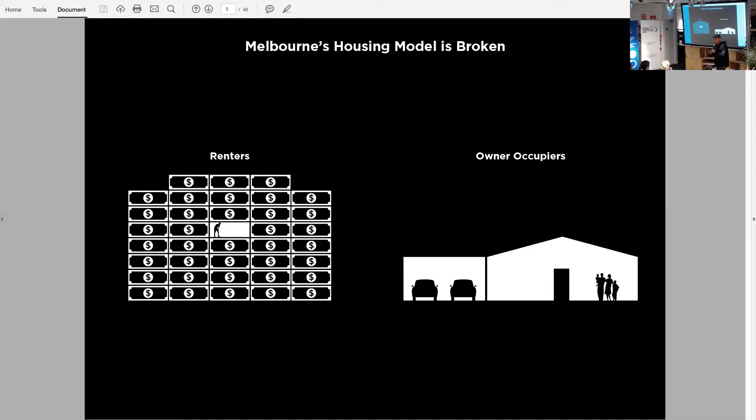If you live here, the way you enter these houses is through the garage. So you drive to the city, and if it's busy it takes an hour and 15 minutes. Then your partner needs a car as well to get to the city, taking them an hour and 15 minutes, working in a different part of the city. You both come home, drive into the driveway, into the garage, the roller door comes down behind you, and you walk into the dining room.

You can watch TV. If you need a loaf of bread or some milk, you get back into your car, the roller door comes up, and you drive 3 kilometres to the nearest supermarket, where you get your stuff and come back and drive into your roller door again.

The great thing about living there is that there are these big houses on these quite small blocks with quite dark roofs, very close to each other, but you never have to talk to your neighbour. There's an incredible sense of social isolation and high degrees of anxiety in these types of settlements. And in the city, if you live in an apartment building with 400 apartments, you get out of the lift lobby with 8 lifts, and there's 32 doors off that lift lobby. You don't talk to anyone because you're probably never going to see them again. There's this sense of anonymity there, so you stand quietly in the lift and don't bother engaging with someone. Again, this incredible sense of modern isolation, despite the incredible proximity in which people are living.

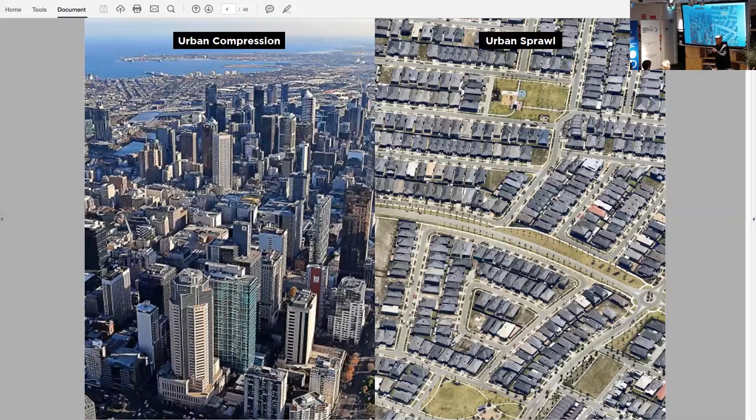In both of these instances, we've seen incredible failure of our social city planning. This is housing of spreadsheet, housing of economics, and not a housing of anthropology or of how we want to live together as people.

The City of Melbourne under Rob Adams looked at how do we actually house people in a meaningful way. If we have to house 3 million more Melburnians in the next 35 years, how are we going to do that? They looked at successful examples which existed pre 80-story towers and pre urban sprawl.

So they looked at Rome, Barcelona, Paris, Amsterdam, even New York. I've seen some incredible images of New York pre-motor car, where the streets were totally occupied by playing children and street vendors, and the streets were a place for people, not a place for cars.

And they historically looked at Melbourne. The way Melbourne used to work was a set of villages around train stations or particular tram stops or a market, so there was a reason for each of these places to be. People would work and live in those same villages. They would live upstairs, work downstairs, their kids would go to the local school. There was a strong sense of community there.

What they found through that study was that of the 3 million people coming to Melbourne over the next 35 years, Rob Adams' team at the city design team at the City of Melbourne worked out that they could house 2 million people, so 2/3 of that population growth, on high streets - Nicholson Street, Lygon Street, Sydney Road - on train lines, tram lines, where people could be serviced by their local community, rather than building at the city's edges, where historically we used to grow our food.

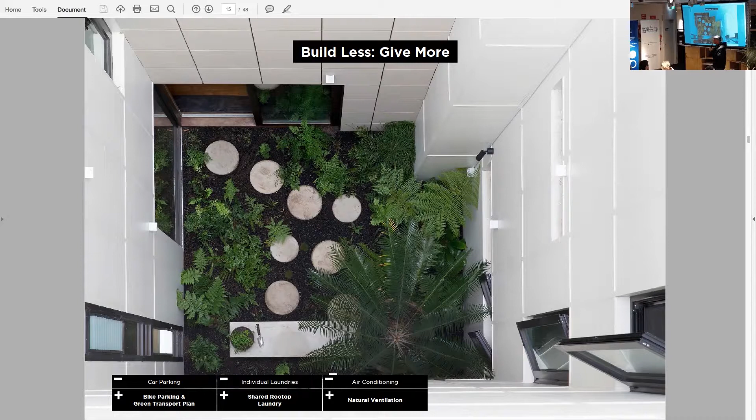Fundamentally, if we were designing in Germany, a 19 to 27 degree comfort range is fine. But in Australia, we're meant to design between a 19 and 23 degree comfort range, so apparently we're not as strong as our German counterparts. Well, historically we used to be, because my grandmother never had any air conditioning and she could deal with it. But anyway, we took all the air conditioning out, and by doing that we kept the cost of the apartments down by about another $4,000 each. So constantly reducing the price of housing.

And also reducing the cost of operation. Tam and I actually live in this apartment in the Commons, and our bill is generally around $42.

When we're away, our usage is 1.2 kilowatts a day based on our fridge use only, because we've got a kill switch by our door, like a hotel, which turns off everything except the fridge. So we know how much our fridge uses.

Interesting, while I'm on the fridges - the Commons is located right next to Anstey Station, right next to the Upfield bike path, right next to the 503 bus, and about 150 metres from the 19 tram. It's about 120 metres from the Brunswick market, which is like the cheapest fruit and veg in Brunswick, and right near the Royal Nut Company, and obviously close to A1 Bakery and a whole bunch of great stuff in Sydney Road.

We designed really, really small fridge cavities. There's only 13 models of fridge that fit in here, and we did that intentionally. The idea was to stop people wanting to drive to the supermarket.

So we surveyed people when they first moved into the Commons. About 55% of people had cars, and of those, everyone with a car drove to the supermarket once a week to do a big shop. At the end of the first year, people realized it was pointless going to do a big shop because it didn't fit in your small fridge. So people started to shop more locally and started to walk.

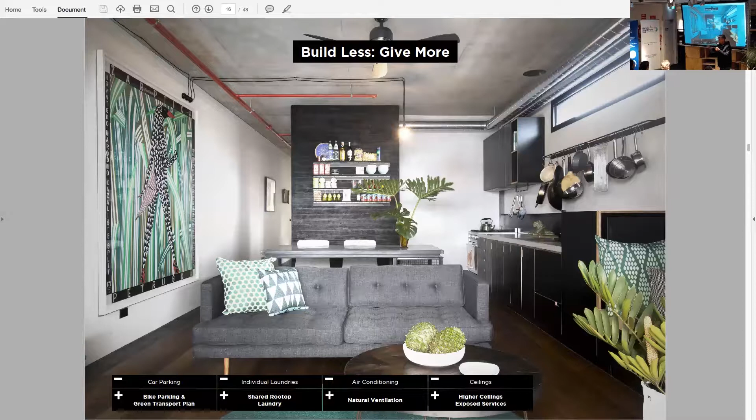There's no tiles in the bathroom, it's just fibre cement sheet with zero VOC water-based epoxy painted on it. There's no chrome on the tapware or door hardware - it's taken off the production line before it gets wrapped and shipped to the chrome platers, chrome plated, rewrapped, sent back to the tapware company, and then sent out to you. It's kind of we take all those things out, so there's no chrome in the building anywhere.

Instead there's lots of raw brass. The door furniture on all of the joinery is not handles, but holes. I don't know if it seems simple, but you make a reduction rather than addition - less material rather than more material. The project architect, Bonnie Herring, who worked with me, was absolutely rigorous about asking herself, with every decision, do I need it or can I take it out?

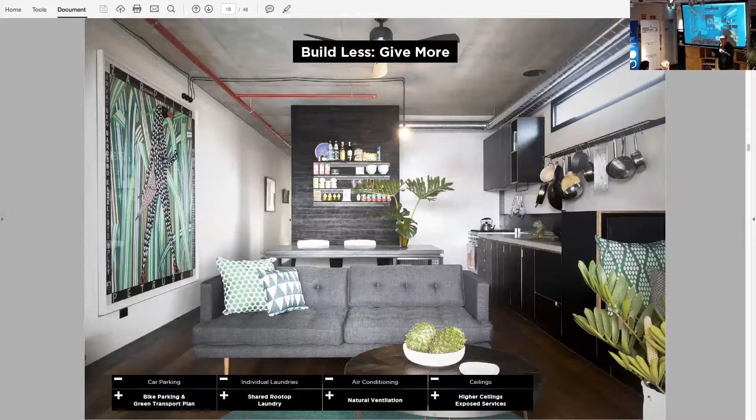And what you would have seen too is recycled timber floors. Every apartment has a different floor because we couldn't find 2,500 square meters of the same floor. So they come from different scout halls and different houses all around the city. And there's this beautiful story through each house.

We've got 135 mil wide boards in ours. Kirsten has 88 mil boards. Jess has got 66 mil boards, and they're different species, and they're all top nailed, not glued. And what that means is that at the end of this building's life, in 100 or 150 years, this floor can be relifted and used again.

What that means is that the floor squeaks a bit, which is okay. It feels like a real floor. And it's wax finished with zero VOC wax product. So if it gets scratched, you can just add some more wax on it. You don't have to, there's no polyurethane in there.

But importantly, because it's not glued down, you don't move into an apartment and have a litre of toxic glue per square metre off-gassing into your apartment for the first 3 months that you live in there.

The interesting thing about when we moved into the Commons is that we thought that it would be a bunch of kind of young professionals coming in. Our first purchaser, the early adopter, the first ever adopter was actually Ursula. Ursula's 65. She's a downsizer from the Blue Mountains. So she didn't want to have to deal with maintenance. She cares deeply about sustainability. She wanted community, and she also wanted a sense of security. So the apartment worked for her.

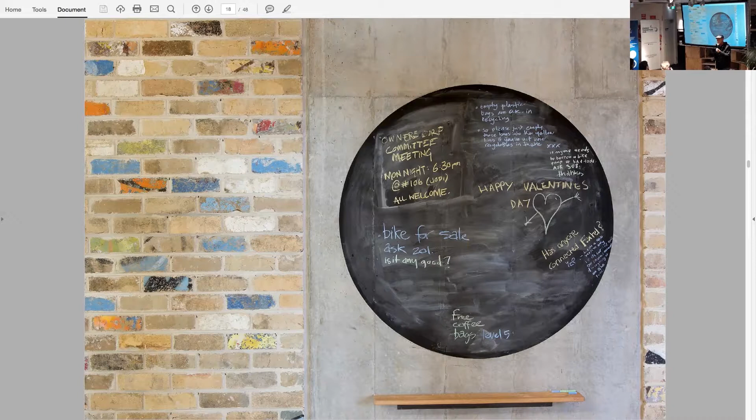It was really, really good for the first 5 weeks when everyone moved in. It was really friendly, and then people started leaving anonymous notes, like who left such and such in the lift. There was a social worker on our level, Fanny, and she wrote on the blackboard saying, I'm going to ask for two things: if you leave a note, please make sure it's positive, and please sign your name. That changed everything. Now everyone keeps their communication positive and signs their name. You can't be anonymous here—you need to take ownership of your communication.

As things have evolved over time, there's now also Facebook groups and many WhatsApp groups—the worm lovers WhatsApp group, the green thumbs WhatsApp group, the dog lovers WhatsApp group, the babies WhatsApp group, the bulk foods WhatsApp group. So people have different areas of interest, and different residents jump in on that.

There's productive gardens on the roof, and we learned a lot from them. We put all the productive gardens on the north side and all the communal spaces on the south side. This was the tallest building in Brunswick at that time, this far north. The second year in, it was really hot, and this got absolutely caned—everyone lost all of their produce after a 4-day heat wave. It taught us a lot about the challenges of trying to grow things on the roof, and that the real challenge is actually the wind, not the sun—really hot northerly winds, and how to deal with that.

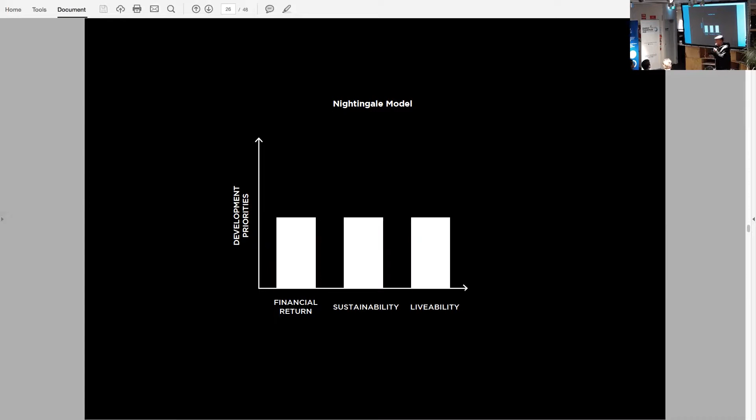What we learned from that was that if we wanted to make this happen, we needed to focus. So Nightingale essentially is the idea of taking this triple bottom line housing outcome and building a financial model to replicate that. It was about this idea of the democratization of capital.

The problem with property development generally is the people that choose to do it—some of the clients I've had in Brunswick come from a range of backgrounds. Real estate agents, a fishmonger, a guy from plastics manufacturing—they've got some money and they decide they're going to do property development. They have no background in housing, architecture, or urban design, but they've got money and they want to make more money, so they end up doing housing.

So the Nightingale model is about the democratization of capital, where we take small amounts of money from lots of people, essentially fundraise the capital, and then get the architect to take direction not from one person with a lot of money, but instead from the people that will actually end up living in the building, the people that will be housed there. We want to make sure we can replicate that model.

The difference between a standard development model and the Nightingale model is this value proposition to purchasers. In Nightingale 1, that was about $95,000. We buy our land at the same price as a property developer. We pay our architects and consultants the same as a property developer.

But with Nightingale, we don't engage a marketing team, come up with a smart name for the building, take photos of cafe lattes and people in active wear running around the park. We don't build a dimensionally inaccurate display suite. And we don't pay some guy in a dark pinstripe suit with shiny shoes to sell apartments.

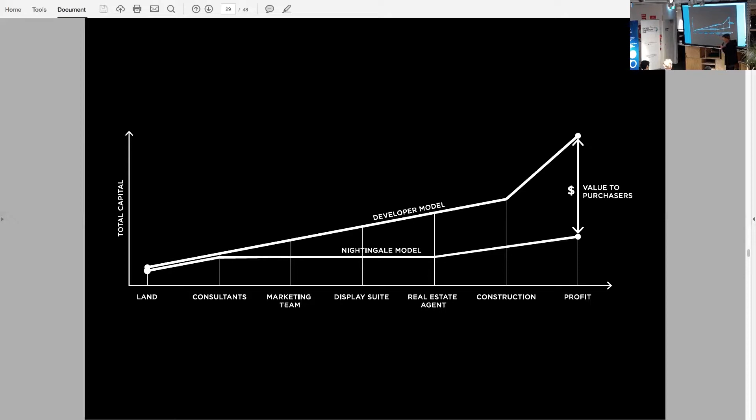It's a financially transparent model. So we sell the housing at what it costs us to build, and we show everyone that, which is why you don't need a real estate agent.

We protect affordability into the future because we don't want this to become a retirement village for rich hippies. So instead, we put a restrictive caveat which runs with the Nightingale apartments. So if you're buying at $95,000 under market, you can't sell it tomorrow and make that $95,000. Otherwise, we should just charge a profit margin and make more money, and I could buy a boat or a car. That'd be nice, would it? No. So we have this caveat which protects affordability in the future.

All of our projects are carbon neutral, so no gas can be pumped into any Nightingale project. We work with Tas Hydro, and we've got a PPA in place where we buy 100% renewables, 100% green power into the building. Unlike every other developer that wraps everyone up into an embedded network where they clip the ticket and charge a percentage markup on that bulk price, we pass that bulk purchase price on to the residents. So if you live in Nightingale 1, you're buying 100% green power, 100% renewables, cheaper than anyone else in Brunswick is paying for black power. So why would you ever change?

So Nightingale 1, it's a pretty simple building. Again, it's not architecturally iconic. The interesting thing here is the parklets out the front.

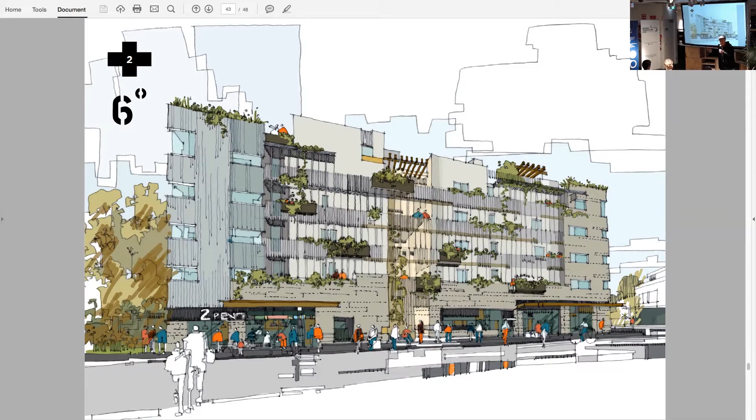Nightingale 2 - the idea was that we could replicate this. Nightingale 2 is about to finish; they've just reached practical completion and they're settling in about two weeks' time in Fairfield, right next to Fairfield Station.

Nightingale 3 - this was meant to be our CLT building, but it's now going to be concrete framed. Nightingale Brunswick East completes in September this year.

And then Nightingale Village. I think this came after we saw the success of Nightingale and the Commons, and what happened when you put buildings on both sides of the street. Two streets south of the Commons, this guy is selling all these old properties there.

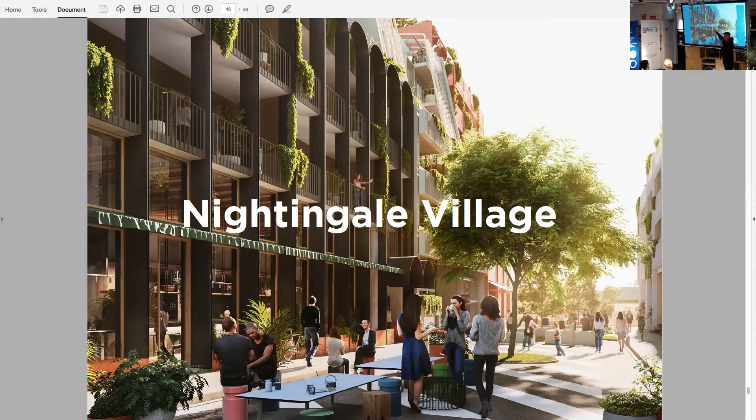And then behind this building, on the south side, is the Urban Coop building - we're putting Urban Coop in there as part of the Nightingale Village.

The idea with Nightingale Housing as an organisation is that we formed to be able to take the IP from each of those projects and share it with other architects, to ideally make it go viral. It hasn't really gone viral because it's really hard.

If you think about the 6 buildings coming out of Nightingale Village, we just settled on a property today - we got a planning permit for it and settled today - that's 12 Nightingales in total. We started on the Nightingale journey in 2014.

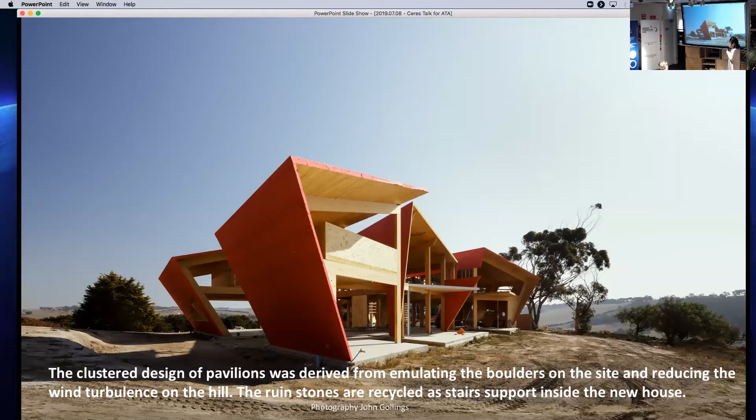The whole design started by, instead of having a simple roof and wall, trying to create something that wraps up completely as a protection, more like a mezzanine where everything is connected, where air can circulate, and where the kids can climb up. We'll have ladders for the kids to climb to their bedrooms, ropes they can climb, and features on the CLT walls to climb too. They're quite active boys—you haven't seen them on site, it's pretty scary how active they are—so this will keep them busy inside.

The whole idea of the concept is that you capture all the views, and all the spaces are down below, but when you go up to your room, it's basically like a cave. So you're not going to be studying in your room or anything. They have a whole kids' quarter for themselves where they can study downstairs and go up to sleep. So we eliminated the idea of having a ground floor and a first floor. It's just a ground floor with mezzanine.

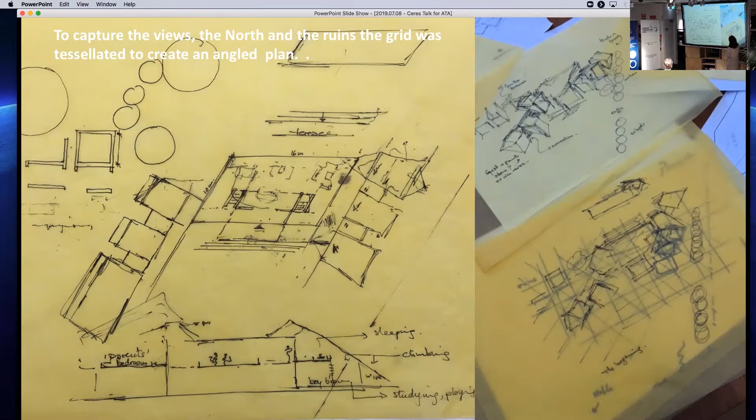The other thing is I started taking the grid of the ruins and tessellated it more to actually capture the sun and the views, rotated. So these are the three boys there actively playing, and this is basically the kids' quarter.

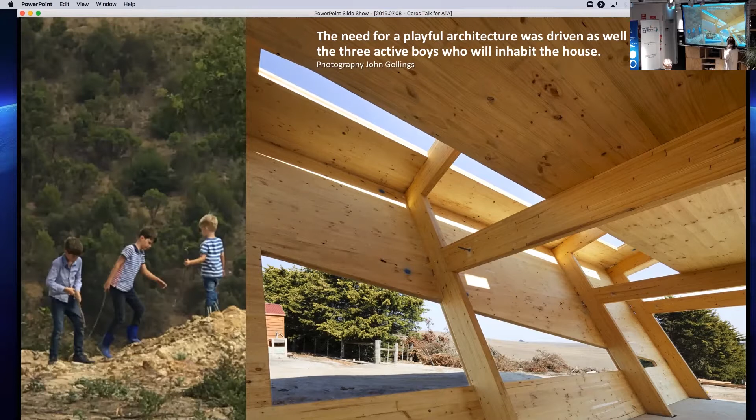This is where we're going to have, on that wall, where they can climb up. The client, when she was there the other day, said 'Oh my God, this is quite a bit higher than I expected.' But seeing them really on site, I think they'll be careful, they'll be fine. Wherever we put things is going to be quite safe. These are basically the early concept sketches, all done by hand. So that's just a little spiel on the concept.

So the sustainability vision for the farm is to become autonomous and achieve zero emissions. It should become, with time, carbon positive. It's not going to happen overnight because we had some embodied energy with the concrete slab and all that stuff. But the vision, not only for the house, is for the whole farm.

When I say basically autonomous, we don't have gas on the site. All the power is coming from solar panels, so it's going to be off the grid. We have batteries, and we're still debating how we're going to have a backup. We looked at wind as well. There's been a lot of research done between us and the client. It's still work in progress on that.

To do anything sustainably, you have to start in architecture with passive design, looking at passive design principles - not just the passive house, the German passive house model, but more the principle of passive design. I think you're all in ATA, so you know them all. The first one is obviously orientation, to really maximize the north facing, and to run daylight simulation to get as much light as possible, to see where we're going to get most of it.

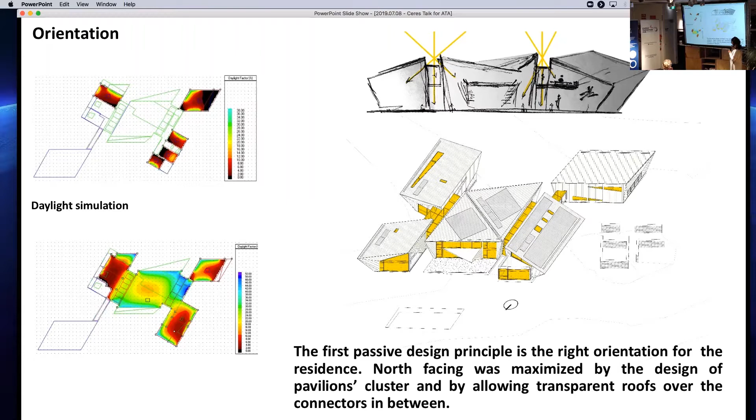I'm an architect, I must say I love glass, I can't deny it. So we do have quite a lot of glass, but we're using thermally broken aluminum on all the windows. In the beginning, we ran a Rhino wind simulation, and it really helped to disrupt this wind turbulence a little bit. At the same time, what I found really important is natural ventilation.

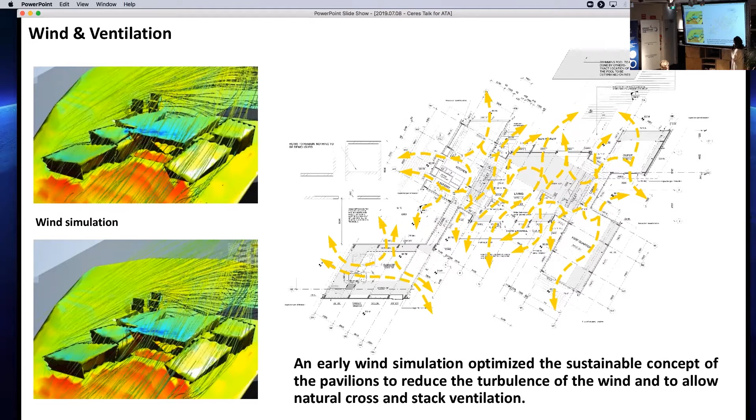Like Jeremy said, there should never exist a room without a window, without having really natural ventilation. So we have quite a bit of natural ventilation circulating, with stack ventilation as well, which is very important. Again, playing with the thermal mass, the decision to go with the concrete slab - I would have loved to have more fly ash in it, but unfortunately we're still a bit a long way from all that. Yet the Pantheon was designed with volcanic ash, with no steel in any of the concrete, and it lasted over a few thousand years. We're using concrete with steel that most of the time corrodes. But anyway, we are where we are and have to deal with what we've got.

The reason we went with a concrete slab is mainly for the thermal mass. That slab is going to be basically sealed, with nothing on it at all - no tiles or anything. At the same time, these were designed so that in between the pavilions, I wanted the client, while going from one pavilion to another, to cross almost like a garden or in nature. So most of the space in between the pavilions will be stepped down, and we're going to have greeneries there - really bringing more biophilic design into the project.

We did get the CLT approved, and we were looking at another project as well using CLT. I mean, of course, it's not non-combustible, it's fire retardant. So yeah, it was approved by the building surveyor.

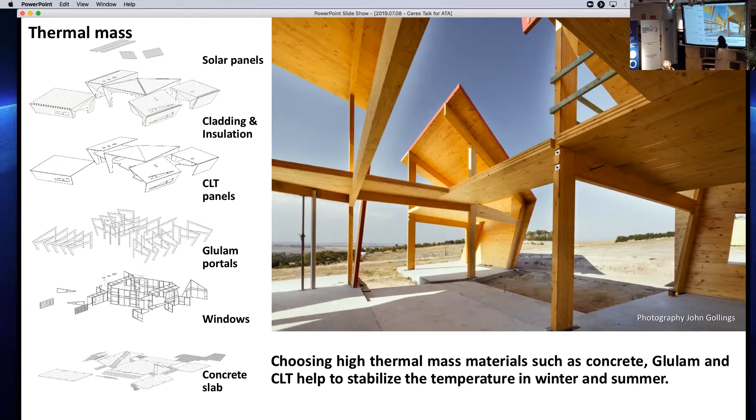The other principle is, of course, the glazing. Having quite a bit of glazing, we need different techniques to protect from the heat. So we opted for thermally broken double glazing aluminum. All the glass has argon gas and low E glass, with a minimum of about 12 to 18 mil between the two panes.

There's another principle apart from choosing the glass and glazing framing—it's working with the landscaping. We have a great landscape architect, and he's going to be working with deciduous trees and all that to help protect this glass.

We had a meeting on Monday, and I was telling the client we should have external blinds, because that's what will work best for these windows. They don't want external blinds, so that's one of the challenges. I said, well, at least we need blinds from inside. They're happy to do that, so I gave them a brochure on blinds manufactured from recycled plastic.

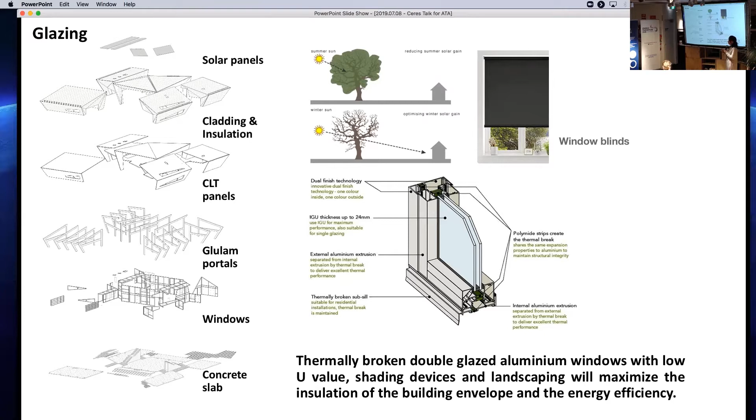The other principle is insulation. I don't think we got 7.5 on this—I think we got close to 7 for the energy rating. But of course, with the CLT, it already has an R1, which is pretty good and very hard to get straight away in any material. On top of that, we have a breathable membrane, and now we have about 40 mil here and 95 mil on top on the roof.

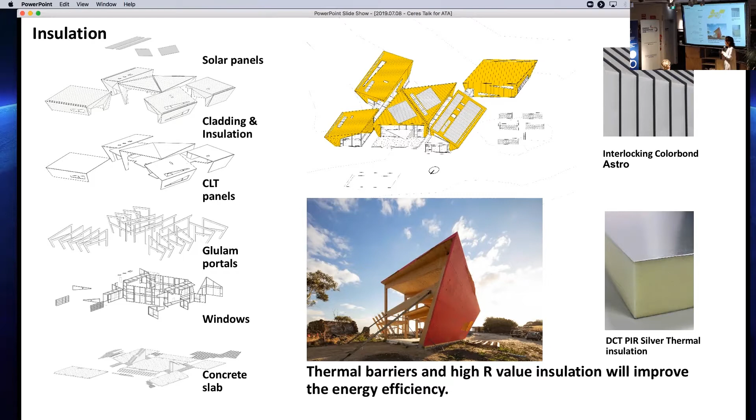The reason we went with the PIR, which is probably not the best sustainable option, is that it's a fire retardant. And because we have BAL 12.5 here, we had to choose something that can work with the BAL. Originally as well with the... okay, I'll move to the material.

Like I explained before, they were all cut precisely. The shop drawings were really more or less easy because now we use software like Revit, and the engineers use SketchUp, and the XLAM use CAD 3D. So it was really easy to get the shop drawing approved straight away and bring them illustrated in our Revit model.

I don't think there was even one mistake. There was maybe one Glulam where we had to cut a little bit of concrete for it or something like that. So really having off-site production, it's really great. It really saved quite a lot of time.

So it really happened quite quickly. And the reason for choosing timber as well is to sequester carbon. That's how it's going to become carbon neutral in the future, by sequestering the carbon.

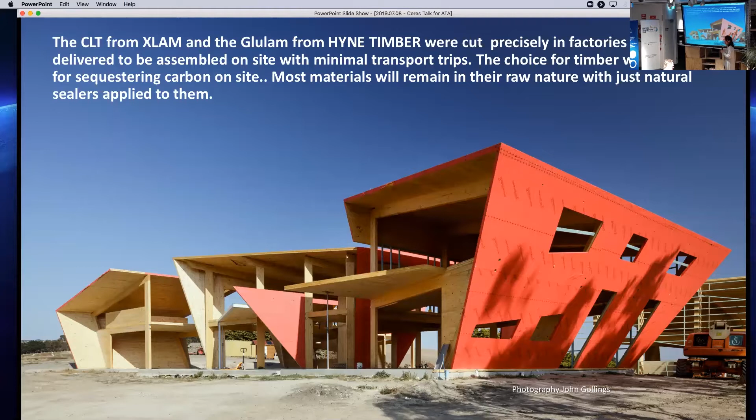I think, yeah, you can see this is actually from the engineer, Nathan from Vistec, who's done that. There isn't really a massive connection between all these CLT and the Glulam.

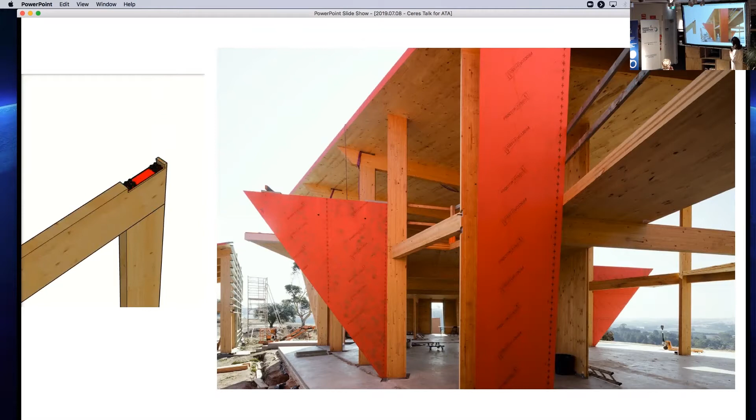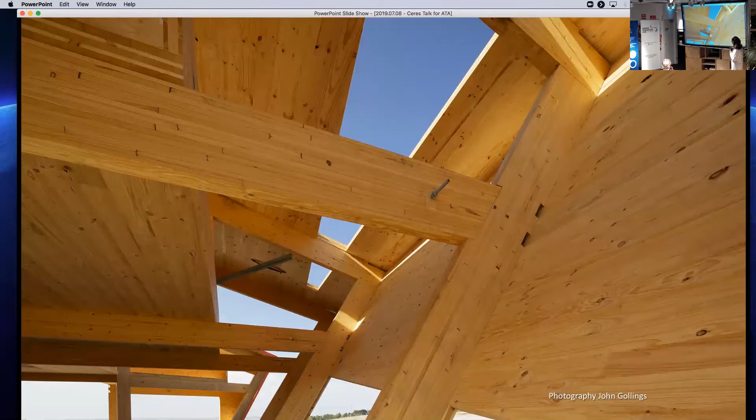So you can see here the roof as well. They call it now in Geelong the Red House. We're very grateful because John Gollings has taken all these pictures.

Oh, sorry, what did I do here? Oh, I'm moving fast, how do I do it? Sorry, I'm going back. Is that going back? No. No, that's the landscape. Oh, this one, yeah sorry, I'm going the other way. I thought it was like the TV remote. It's downloading, oh.

The client, the wife is actually a graphic designer, and he is an agricultural scientist. So they really make a very good pair, basically.

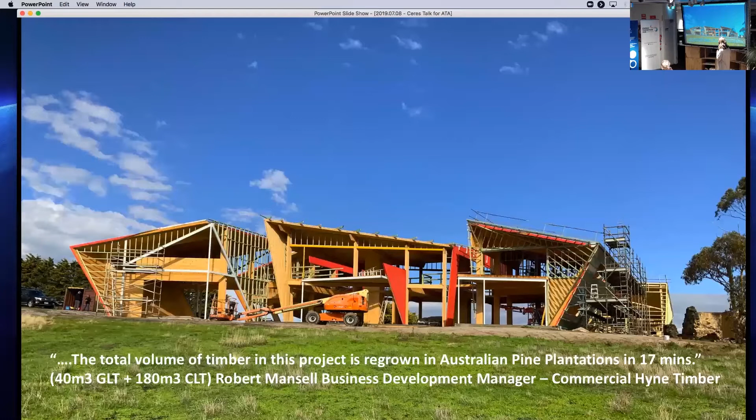Were we there? Yeah, yeah, this one I was going to show you. The total volume of timber in this project is regrown in Australian pine plantation in 17 minutes. So I thought that was quite... oh yeah, no, replanted, yeah yeah yeah. Better than nothing though. Okay, so now we can move forward.

All the materials, I tried as much as possible to get sourced from Australia and locally. Most of the labor and all the contractors are coming from Geelong as well, which is really quite good. We tried as well to specify as much as possible everything to be with low VOC or no VOC, but like I said, these are challenges, you can't always win on them.

Regarding the water, we already installed an 80,000 liter water tank which will provide for the residents' needs basically in the building. Gray water will be used for flushing toilets. And we provided a septic tank. And we actually put, sorry?

Yeah, well, exactly, I mean the septic tank. Yeah, exactly, yeah, yeah, yeah.

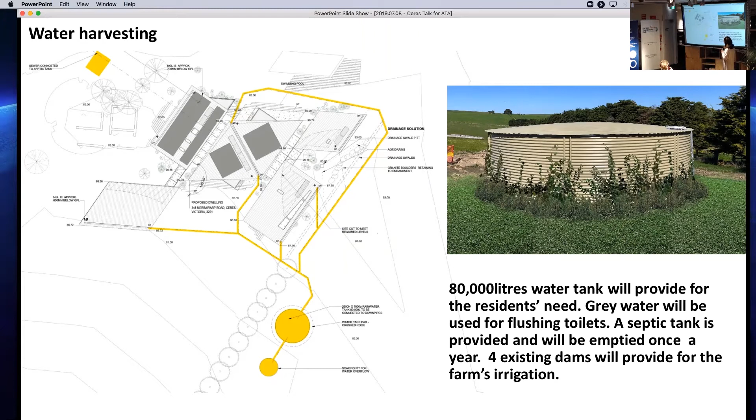Well, I remember years ago I did a project where we didn't even use a septic tank. We got a geotechnical engineer who worked out on the whole land how everything could be absorbed. But look, we're not going to argue now, there's a lot of regulation and things. Anyway, the septic tank that was chosen, you really need to empty it once a year or once every 2 years, something like that. There are already 4 existing dams to provide for the farm's irrigation as well.

Water efficiency, I mean again, I love heat pumps. They are the most efficient hot water units at the moment. It's just trying to hide them later on, it's going to be a problem.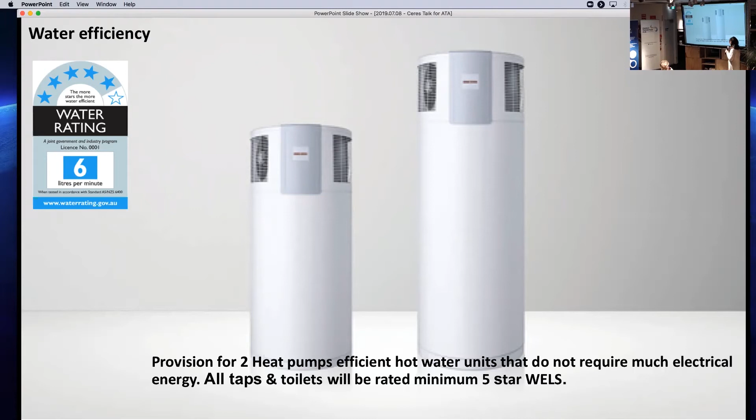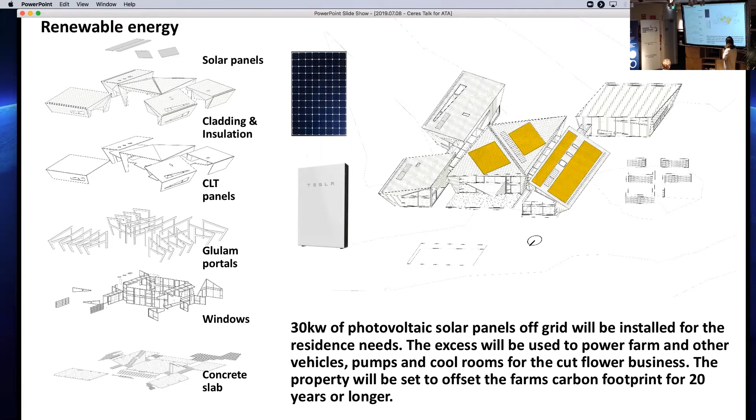So we decided to forget the integrated ideas and just go with colorbond roofing, especially with all the fire issues that were happening with cladding, so we stuck with colorbond for the moment. All the solar panels are going to be installed on a big shed on the farm. Even the client now is pushing for more than 30 kilowatts, because even though we're going to have batteries, you still need quite a bit of backup.

Heating and cooling. Originally, as specified, we used EcoHeat, the solar air heating system. The client now decided, since we're putting in so much solar, why not use air conditioning, or hydronic heating, or anything that can run on electricity since it's renewable energy anyway. We're still debating on that, but there will be fans as well to provide for cooling. I'm not worried at all about the cooling - it would be fine even without anything - it's only the heating. Now we're looking at a big fireplace that will heat quite a bit, and that will work until we figure out exactly what we're doing for the rest of the heating.

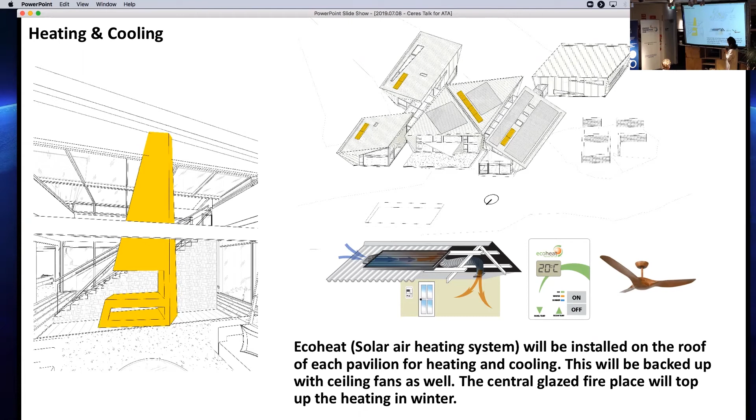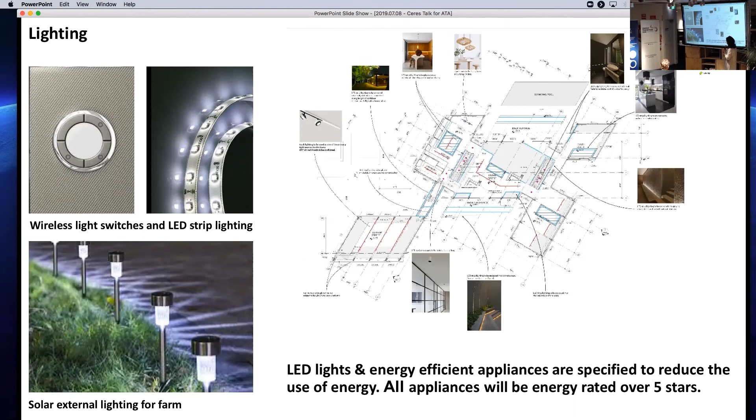With lighting, everything specified is LED, with solar external lighting for the farm. It's not just about having a lot of solar panels - it's about how much power we're using and how we're managing it. I think people still think that if you put solar panels in, you can keep everything on, but it doesn't work this way. We have to manage and use that power realistically.

The farm is going to be autonomous in a way. They've already planted a lot of flowers, Protea and Banksia, and started selling them even though the house hasn't finished, which will provide them with income for the future. The clients are very hands-on - they already have sheep, and a few cows because her father has cows.

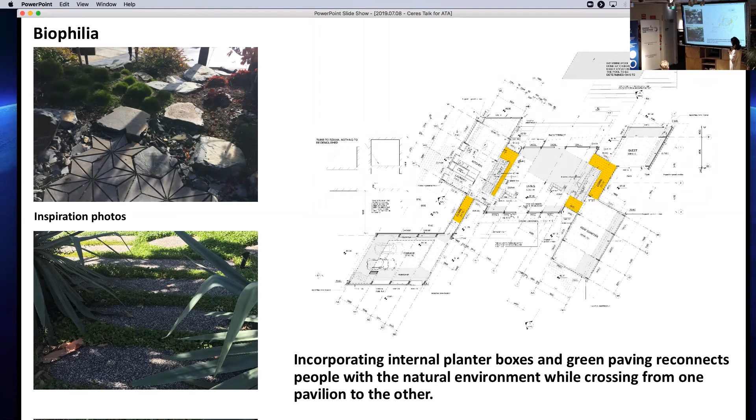You can see all the plants on this side, some of the other wattles. With biophilia, it's really important to keep the connection between nature and the house itself, incorporating internal boxes and green paving everywhere. We have a great landscape architect, Ric Day, who was really good at working with indigenous planting and resourcing everything locally. We're creating a garden that connects everywhere together, with the principle of xeriscaping - really minimum water.

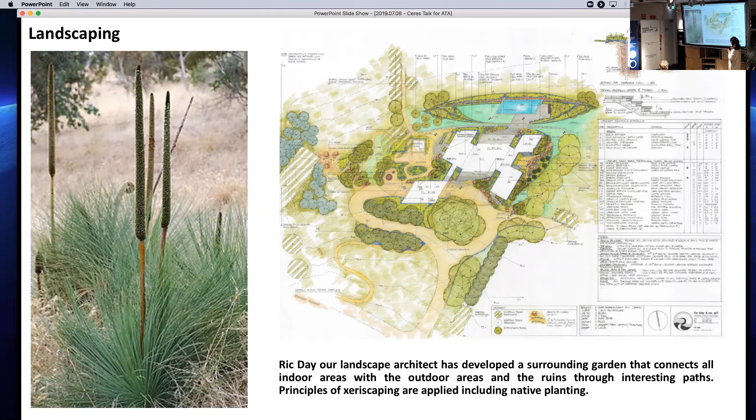This is just a sequence of the prefabricated CLT and glulam construction. The engineer provided us with a sequence, and that's exactly how it was built.

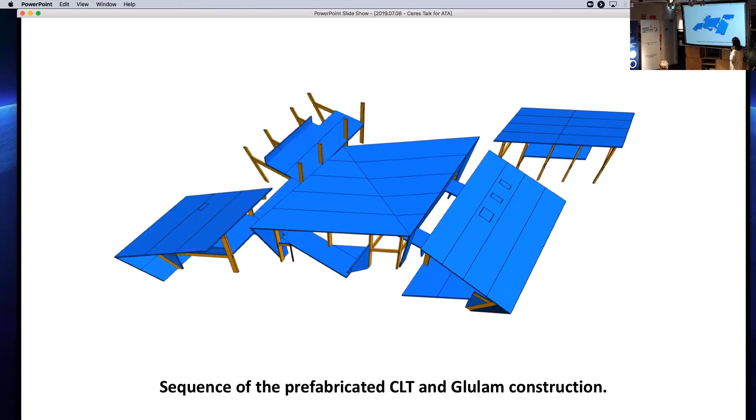That's your tummy rumbling.

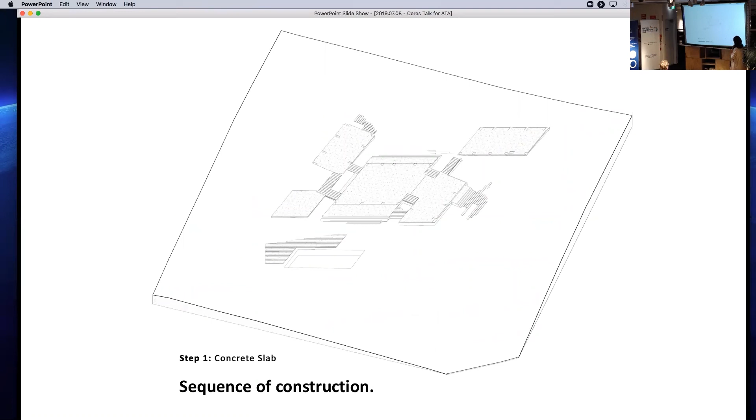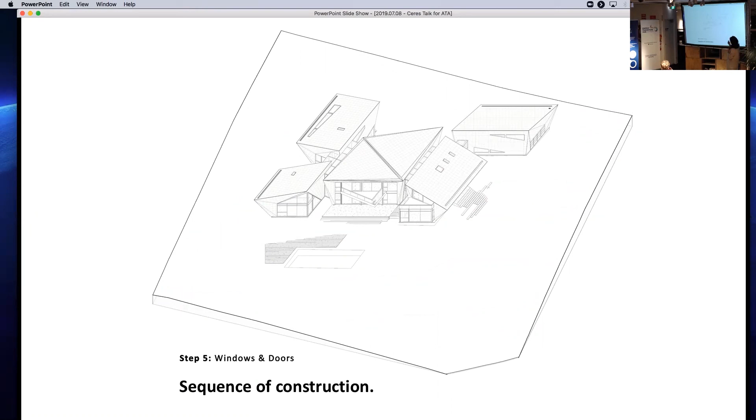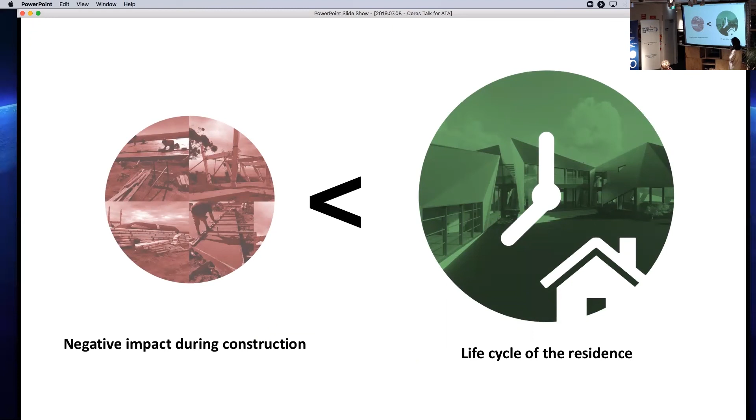This is a sequence of construction - the concrete slab, then the framing, the CLT together, and then the cladding. Actually, the cladding - the roof is almost finished now. I think they're finishing this roof here, and then they're going to start cladding the rest, and the windows happen end of this week. These are some of the pictures. We're hoping that with the life cycle of the residence, it will negate the impact during construction. And that's it, thank you.